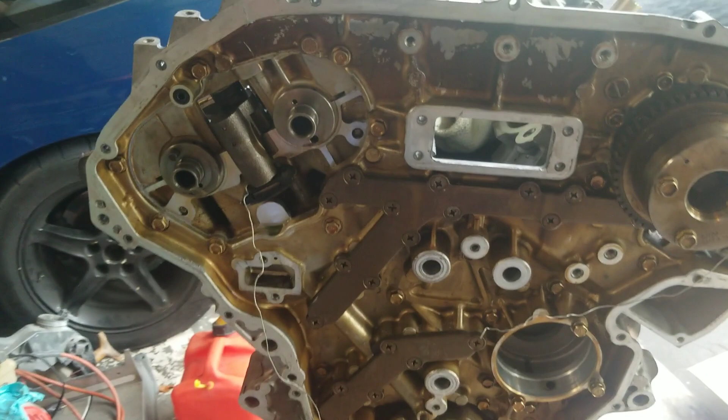Alright guys, so it looks like I was getting some progress. This thing's funny, bro, because you gotta put on these guys first, the tensioners. Well, yeah, put those on first, so then you can basically get this cover on. So I got the cover, had to clean it up, do all that shit. Put on my oil pump, got that on, bolted down, whatever, yada yada yada.

And then these are the rev up cams. So I have the marks lined up with the thing there, that mark there, and then that's a different color chain, and then you have these two marks here, and that's there, that's that.

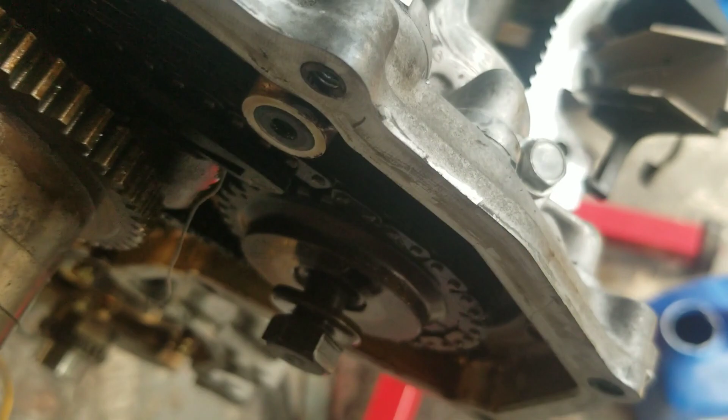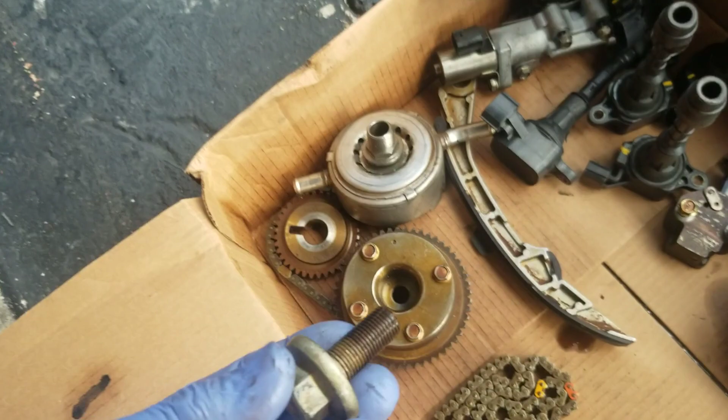But now, since these are the rev up cams that have VVT on the exhaust side, I'm running into this issue where the bolt, the stock one, I have one here. It's too damn short. Alright, so it doesn't touch these threads because it's all the way back. And then I have this one that's, what do you call it? But anyways, long story short, I need to run and get me a grade 8 bolt.

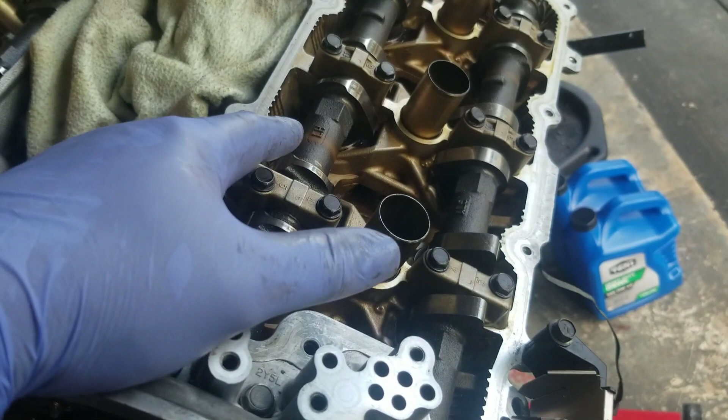I was thinking about doing that, but if I go to swap back to these stock cams, that means I gotta let go all of this, and then I can let go of this cam top and then all of these, and then come back and do it. How much RTV I had to use on this backside? It was like legit RTV around there, RTV around there, RTV around the water pump, RTV around this pump, and then some other shit. It was just a lot.

But I really want to use these cams, because I know they're gonna wake up this motor even more. But regardless, I'm gonna measure out, get me 2 grade 8 bolts, because I'm gonna need one for this other side, and then be fine and dandy. That's not a big issue, that's a quick fix.

But anyhow, hopefully I can do that so I can get this timing done, and then crank it through some revolutions, make sure it's not kissing any valves. Technically it shouldn't. If not, I could always put it at top dead center, and then change the cam like one tooth. That's not ideal, but that's what we've done. But anyhow, we will keep moving forward.

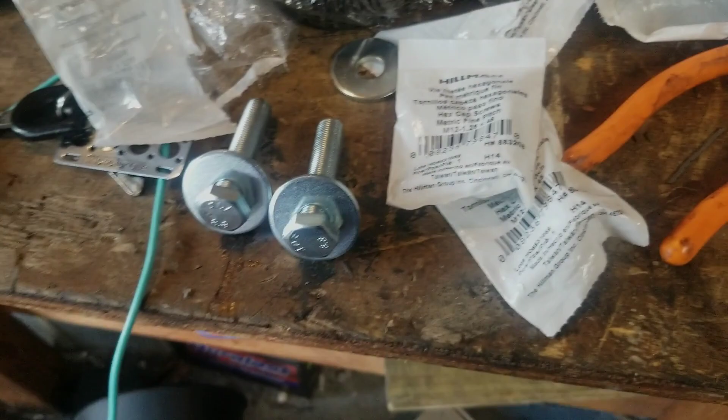Alright guys, alright, so if anyone's trying to do these rev up cams on a regular DE, what's up? Yeah, see, people be bothering me, son.

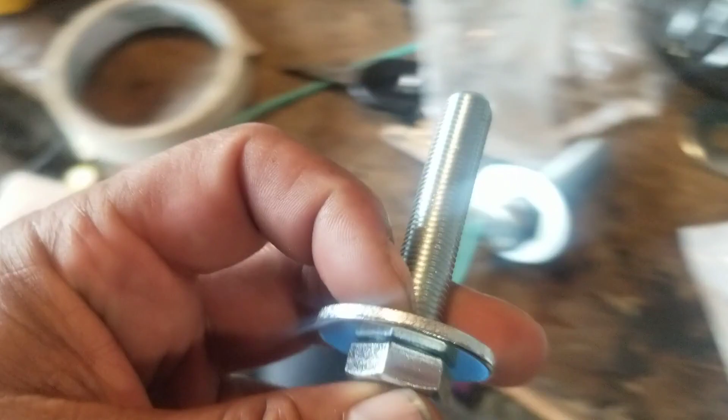Anyhow, these are M10 1.25 by 40s. I did that, got a washer, where basically the other bolts would have worked if they were threaded all the way through. Since they only halfway threaded, they stopped. And there we go. So I just need to torque that down. And then, of course, if you're looking, those are grade 8 bolts.

I was thinking about putting in a lock washer, but the stock ones don't come with one, and I don't want to kind of throw off the balance, even though it's going to be real minimal, but we should be fine. So anyways, like I said, that's kind of golded, you can see on that mark, and then the 2 on that mark, and then this and that, so I could torque those down. That side's done, and then pop out my stopper and done.

So hell yeah, making some goddamn progress, bro.

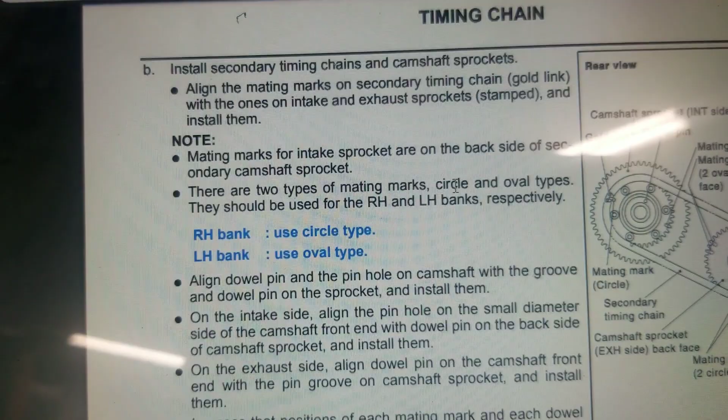Shit can't stop me. All right, so this is the reason for the FSM. There's little things in here like this. Basically, the sprockets are the same on both the left hand and right hand bank, but the timing marks, if you're trying to do a timing, you want to have it all.

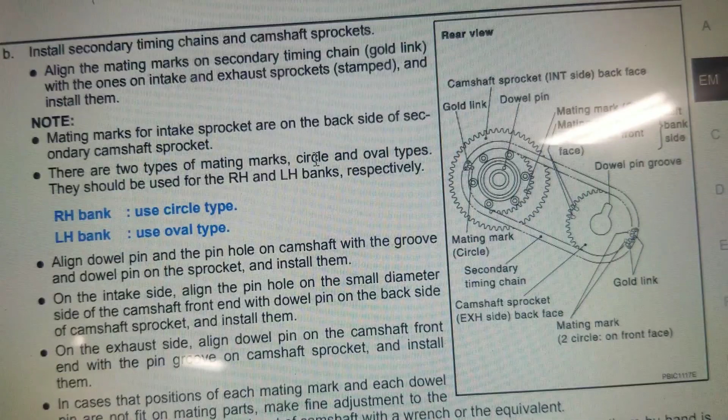I mean, technically it's just a mark, it doesn't matter. You could count teeth, but you would need it properly set up like that, or here, but it's kind of hard. This one's got fine teeth, but anyways, don't even listen to me regarding that. But really, this FSM is saying the right hand bank uses the circle type and the left hand bank the oval type.

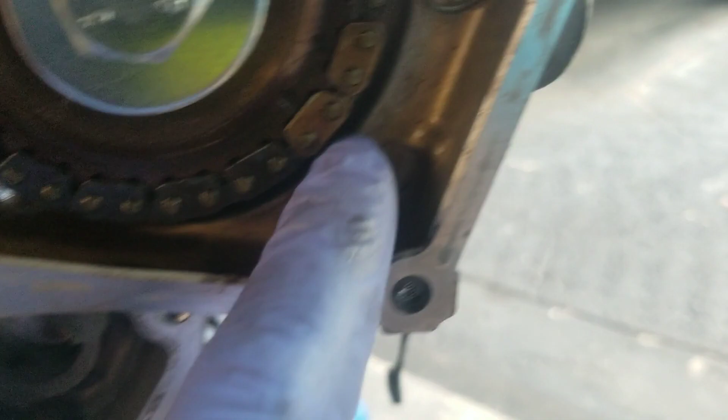So if you're going to be doing timing on here, this is circle type, and there goes oval type. So right hand bank, use circle. Left hand bank, use the oval type. And then there we go. So that's basically like top dead center on the right hand bank. And this is sort of like top dead center on that. I mean, it's not ideal, but it's close. But anyhow, whatever, I got it.

So now I just need to torque all these, but this shit keeps on jumping because of the spring tension. So I'm having a little fun with that. But besides that, it's coming together. And then you look at this. I obviously didn't have stoppers, so I had bought some chicken wire for, that's gonna be a problem. Son of a bitch. That's gonna be a fucking problem. That's too funny. Basically, I'm gonna have to push this down and then see if I can pull it out. Maybe that one I can blow it out. Ah, man, son of a whore.

Alright, so I got my timing all done. I got my marks lined up there. I know the ones are inside. This one goes there. That one goes there. That one goes there. Water pump's on. This side's nice and tight. Guide's there installed. I still got to put the guide on top, that small thing. And then your tensioners here, and then there. So this will have the slack side. This will be your tight side. And yeah, we're good to go.

I just need to put on this top cover, and then give it some rotations, make sure everything's good, and then once I am good there, put on that front timing cover, which will be fun, because I gotta clean all the other side. I already somewhat cleaned that, and then slap on the bottom. Shit, we're going this weekend. Be boosting by Monday. But yeah, we'll see what's up.

All right. So for your knowledge, basically I torqued everything down. These were torqued down to 75 foot-pounds. It's calling 73 to 79 in the FSM. I just went halfway. I don't really like tightening crazy, but that ain't gonna move. But anyways, got these M12 by 1.25, 60 millimeter length bolts to work with the rev up cams, because the rev up cams' thingy is all the way deep inside there. So anyways, that's locked and loaded.

Oil pump's there, got everything. So now what I need to do is put on my front timing cover. Actually, go to the store and get me a new front crank seal, so I'll change that out. But shit, if I keep on this, I could be boosting by Monday. But nah, I doubt that's gonna happen. I got shit to do. But anyhow, long story short, she's coming together.

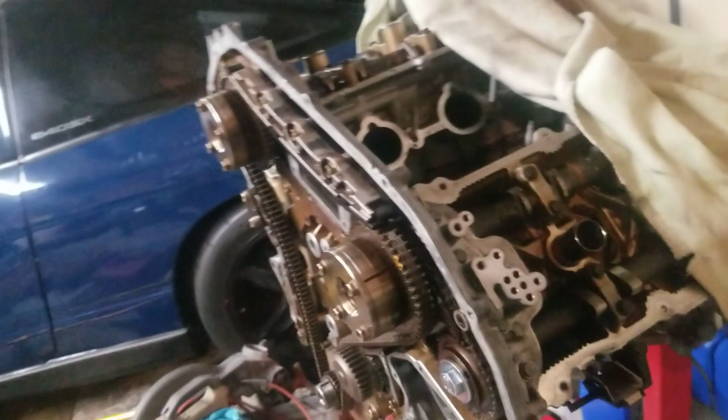So rev up cams, beefier rods, and things. So it's not stock anymore, but it's stock to a certain degree. But them damn rods are too damn weak. If these rod journals, the big end, were the same on the 3.7s or even the high rev 3.5s, I would have been able to, but they made those journals on the crank bigger, and even the mains themselves were bigger too, because I was thinking about swapping over a 3.7 crank, or even a high rev crank, because essentially I believe it's the same stroke, but I don't know.

Sorry, the stroke is different on 3.7s. The 3.5 is the same, the high rev 3.5, but whatever, I'm just talking out of my ass. But anyhow, so I got that. I made 2 revolutions, or quite a bit. Then I went back just so I can get my timing marks lined up back. And yeah, she's looking good. Feeling good. I'm very excited about this. So yeah. All right, guys.

All right, so it's 12:40 on a Saturday night. Got my drink in hand. Got a front timing cover installed. Changed out the crank seal. Actually, it was pretty good because there was oil caked up around there, so I was good to change that out.

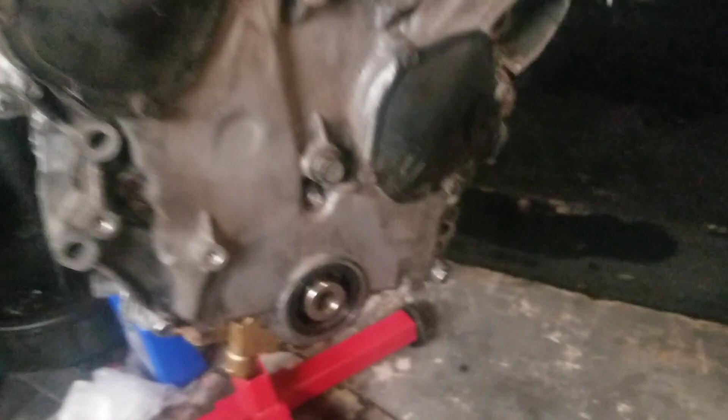I mean, this shit got 22 freaking bolts on the front. You can see all those 10s. It's basically 20 10s and 2 12s on the bottom, and then a whole bunch of fucking RTV. I never removed these. These weren't leaking from before. I ain't gonna touch them. I wanted to kind of spruce up the front cover. I just brake cleaned it. I'm like, bro, if I were to paint it, that's too involved. I was like, fuck it, we going stock dirty color.

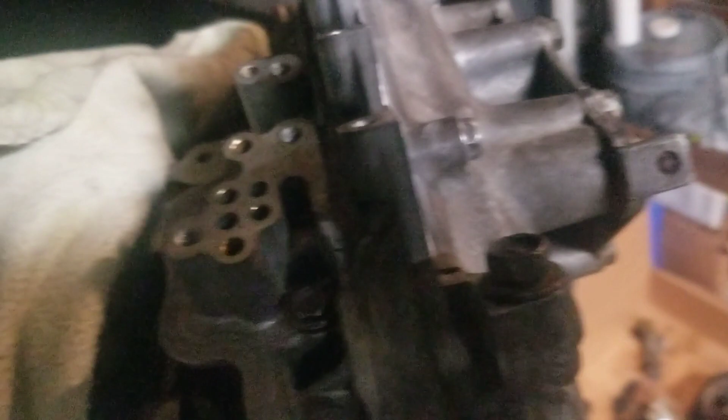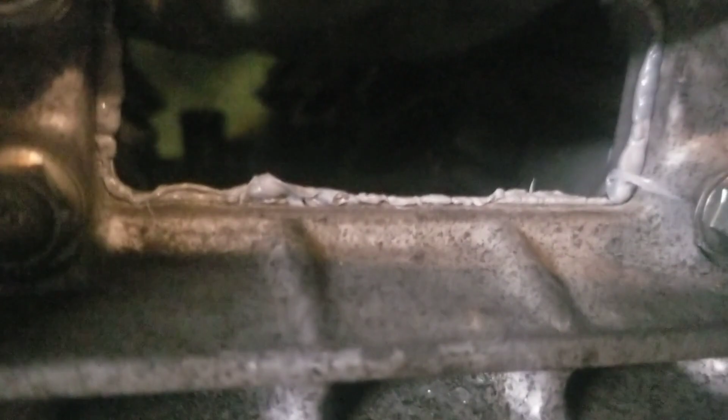But the only thing I did do to brushing up was, let's see if you can see those bolts. A lot of those are rusted, so I just wire brushed them real quick. But then you see, I guess this is from working on the house. You see that caulking line, which is basically RTV line. Let's get out of the sun. But yeah, I just hate when you see it all conked up and looking all nasty. Oh shit, I forgot to change that. You see how that looks? Between that to that, you tell me which one looks better.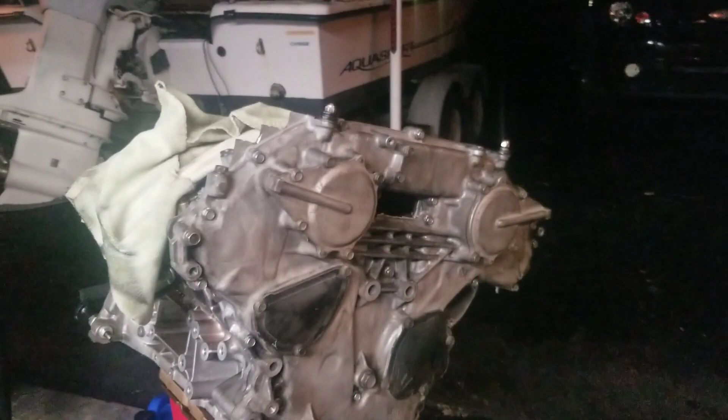Anyhow, long story short is I'm slowly moving along on this motor, just to basically put on the bottom end there. There's one O-ring that's on the oil pump, right there, and then there's another O-ring that I have over there that bolts in between the mid section. I haven't even got the proper terminology for that shit. I could look in the FSM, but fuck it. You guys know what I'm talking about.

But if you want to comment and say, ha ha ha. I'm being like all them YouTubers only because I'm drinking right now. So it's like, oh yeah, you gotta captivate the audience and all that shit. Fuck that, nigga. We trying to just get this shit going. But anyways, this is what's popping.

So get this going. The only thing, there's a seal that goes right there. Where's my finger? There goes my finger. Right there, that I need to get. I got one for the rear main seal, but this front main seal kit didn't come with it. So I don't know if they call it like oil pan seal or some shit. But I need to get that because that's a big egress to fill up. If you were to say, oh, let me just do some Honda Bond or RTV, whatever. But regardless, she's coming together.

I said Monday. Monday ain't happening. I'm going on that bitch tomorrow morning. We're going to go to Trapper Joe Nelson. If you guys want to Google that, that's like Tequesta. Fucking north of here. But crazy shit. Anyhow, long story short, progress, guys. All right, late.